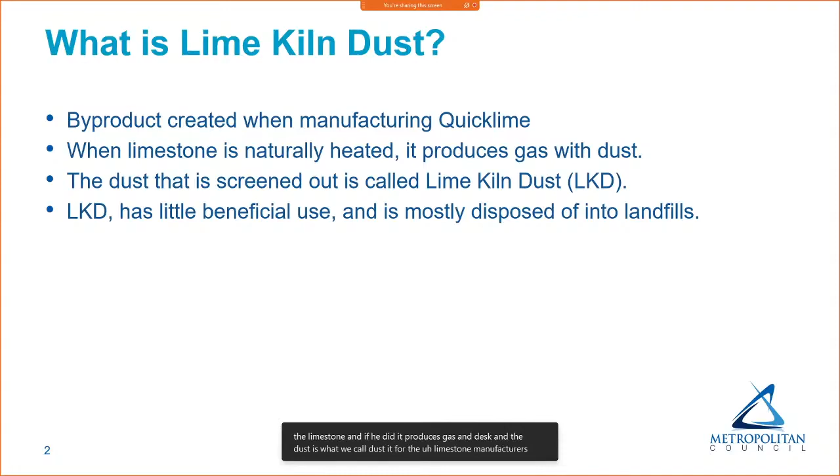Next slide, please. So first off, just an introduction to what lime kiln dust is and what we use it for. It's a byproduct of manufacturing quicklime, and when the limestone is heated, it produces gas and dust, and the dust is what we call lime kiln dust. For the limestone manufacturers, it has very little use and is mostly disposed of into landfills.

Next slide, please. So what we use it for at Metro is when the incinerators are down, there's still continual biosolids sludge being produced. So some of that has to go through the load-out system and be disposed of at a landfill. It depends on the situation, whether sludge storage is full or not, a lot of details anyway. But the point is, when it goes to landfill for disposal, according to Minnesota law, it must be a Class B biosolid. The way that we make our biosolids a Class B treated biosolid is to raise the pH of it for 2 hours, and that's what our lime kiln dust does.

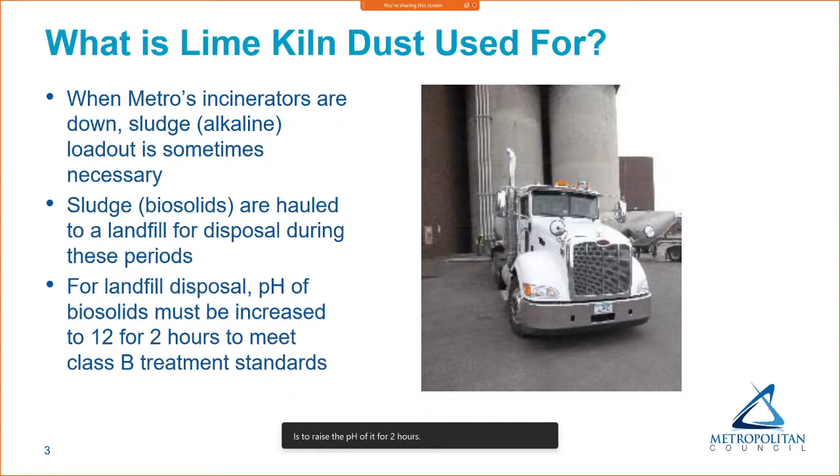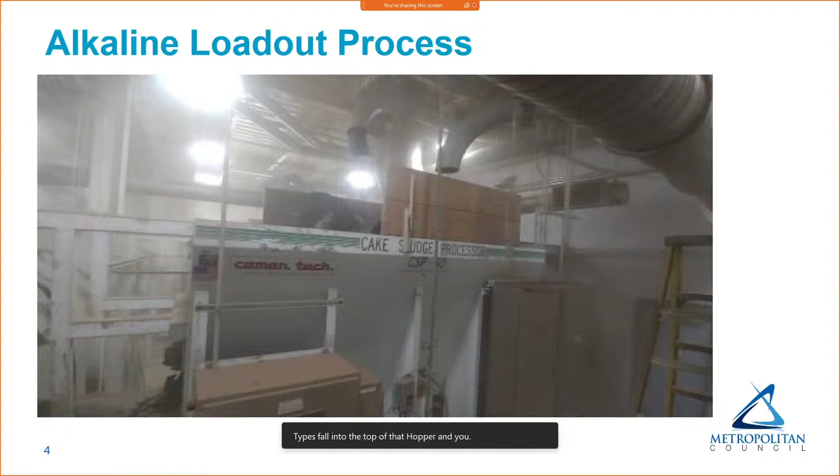Next slide, please. So here's a couple photos of how the system actually works. What you can see is a giant hopper there. It says cake sludge processor, and then 2 pipes fall into the top of that hopper, and you can actually see some of the biosolids falling into the top of that hopper.

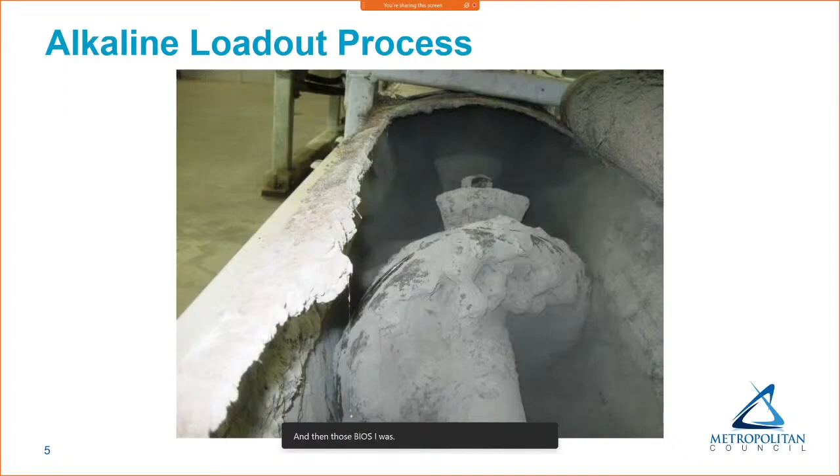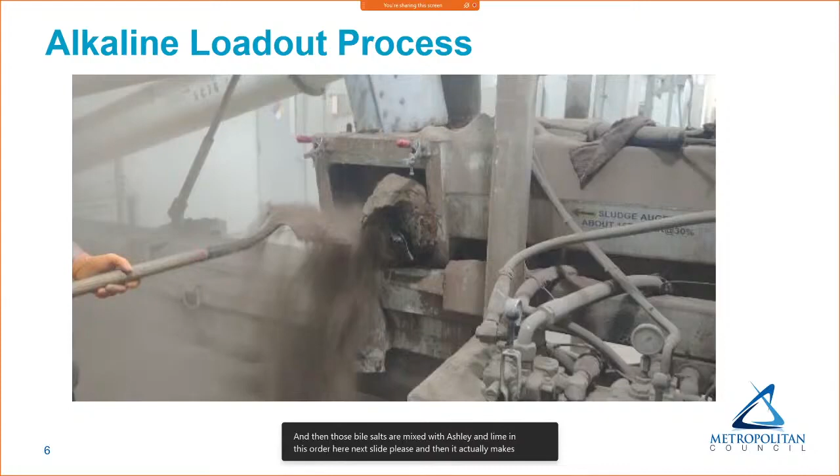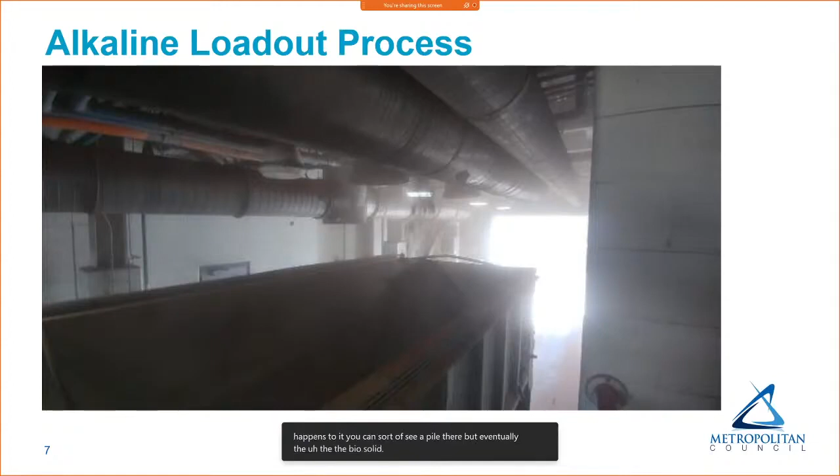Next slide, please. And then those biosolids are mixed with ash and lime in this auger here. Next slide, please. And then it actually makes a sort of dirt-like consistency as opposed to a spongy biosolid material. Next slide, please. I didn't have a great picture of this, but this is what happens to it. You can sort of see a pile there, but eventually the biosolids fall out into the back of a truck where it's hauled to landfill. Next slide, please.

As I mentioned before, this contract is a renewal of the current contract, which is expiring. And we completed an invitation for bids on January 4th.

We had a pre-bid meeting on January 19th where we had 2 plan holders and they both attended. We had a public bid opening on February 4th and we had 1 responsive bid from Omni Materials. Since we had 1 bid, procurement completed an adequate competition determination.

Next slide, please. This contract is for 4 years and an amount not to exceed $1,476,000. The first 2 years of the contract would be at $86 a ton, and the second 2 years, $88 a ton. The Office of Equal Opportunity did not set an MCUB goal for this contract due to the specialized nature of the product that we're purchasing.

Next slide, please. The proposed action is that the Metropolitan Council authorizes the regional administrator to award and execute a contract to Omni Materials, Inc. for lime kiln dust delivered to the Metropolitan Wastewater Treatment Plant. This contract will be for a period of 4 years with a total procurement not to exceed $1,476,000. And with that, I'd be happy to answer any questions.

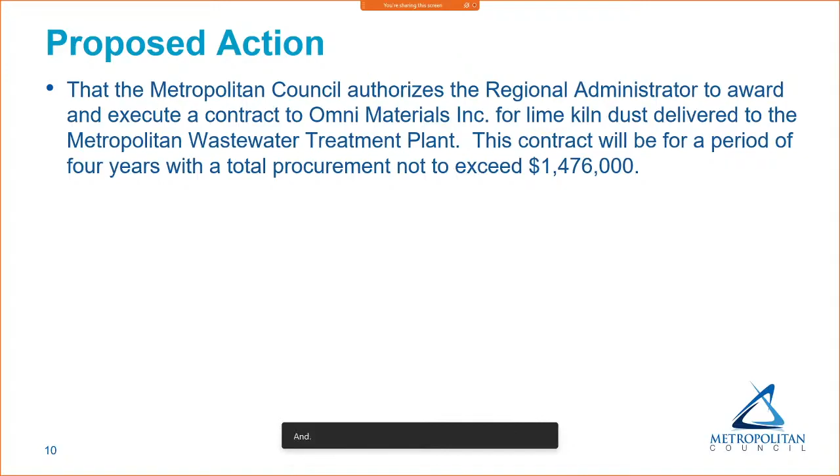Any questions? I can't see you all on my screen, so I see Councilmember Vento's got her hand up. Yeah, and this is a very, very random question, Joe. I probably should have warned you that I was going to ask this, but is this a product that poses any environmental or human risks in terms of exposure? I mean, are there side effects or hazards related to it?

Mr. Chair and committee members, yes, I guess I would say this is a dust that can damage lungs if you are in close proximity to it, and there's a lot of it. So we take great care in handling this.

I failed to mention it, but one of my pictures on the slides was the truck. It blows the lime kiln dust into the silo itself, and then it is mixed with the biosolids when it's coming out into the back of the truck. So when everything is running correctly, no one is in contact with the lime kiln dust itself.

Okay. And there's training that goes on for— excuse me, Mr. Chair, if I could. Yep, please. There's training and procedures to help the folks working there protect themselves and maintain safe practices.

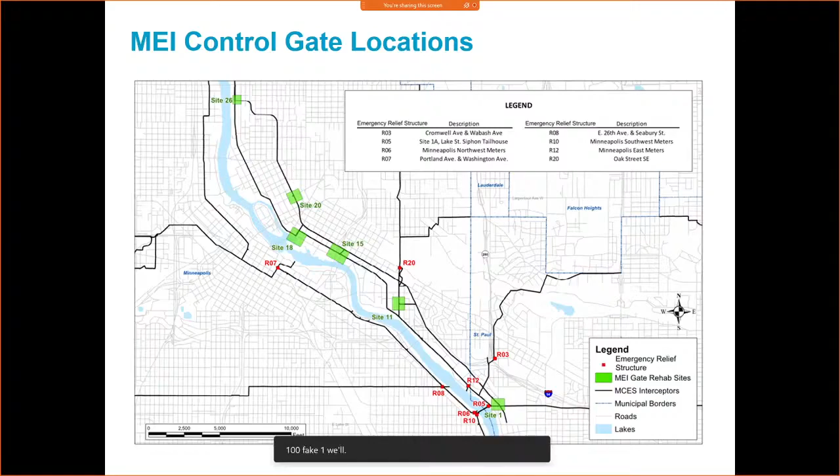Site 11 is at Oak and Essex on the University of Minnesota. The new MEI tunnel is capable of storing wastewater under surcharge pressure with regulating gates at its outlet to the joint interceptor 1MS 100 at Site 1, located at Pelham and Otis. Next slide, please.

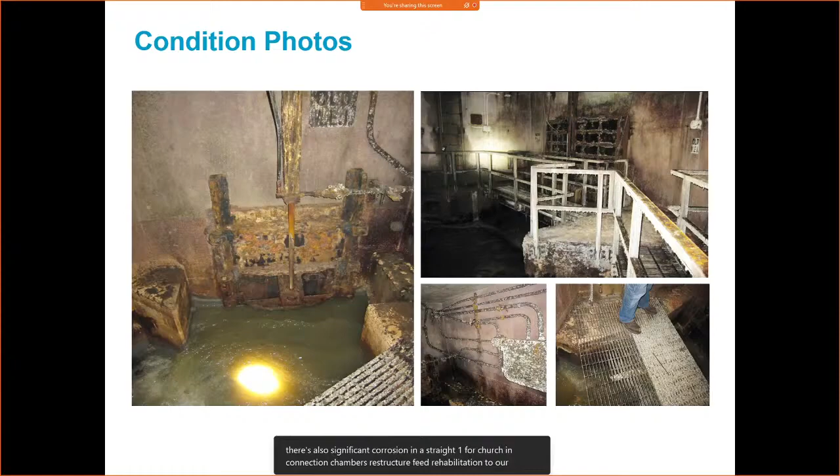A recent inspection of the MEI control gate structures identified major corrosion of sluice gates, grating, concrete, and electrical systems, as you can see in the photos. Other corroded elements included ladders, stop log channels, crane rails, hatches, and hydraulic power units. All existing sluice gates were found to be inoperable. There's also significant corrosion in the Site 1 surcharge and connection chambers. These structures need rehabilitation to allow the MEI system to control flows and surcharges and maximize system capacity as originally designed. Next slide, please.

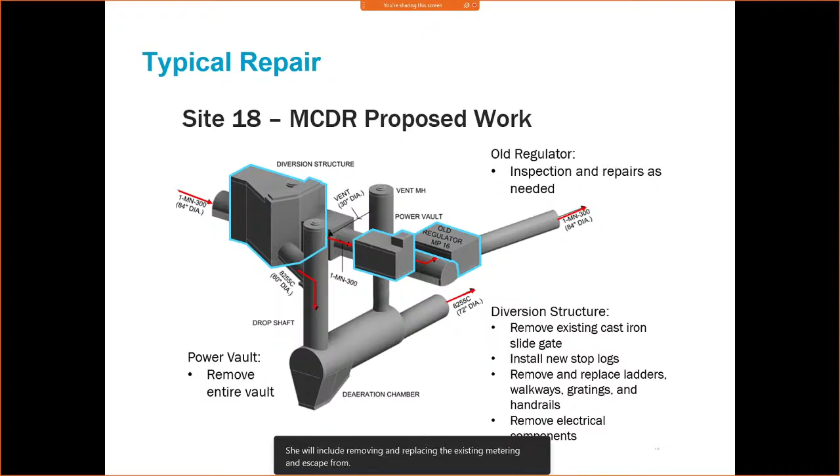Typical control gate repairs will include removal and replacement of existing sluice gates and hydraulic power unit systems with stop logs, removal of electrical systems, removal and replacement of ladders, platforms, gratings, and handrails, and cleaning and repair of concrete surfaces as needed. Site 1 rehabilitation will include removing and replacing the existing metering and sluice gate systems and replacing the roof of a fan building. Next slide, please.

4 bids ranging from $13,424,500 to $15,595,000 were received. PCI was the lowest responsible bidder at $13,999,225. Next slide, please.

The proposed action is that the Metropolitan Council authorizes its regional administrator to award and execute a contract for MEI Control Gate Rehabilitation Project 807-643, Contract 20P291, to PCI Roads for its low responsible bid of $13,999,225. Next slide, please. Thank you, Mr. Chair, and I'll take any questions anybody has. Thank you. Any questions?

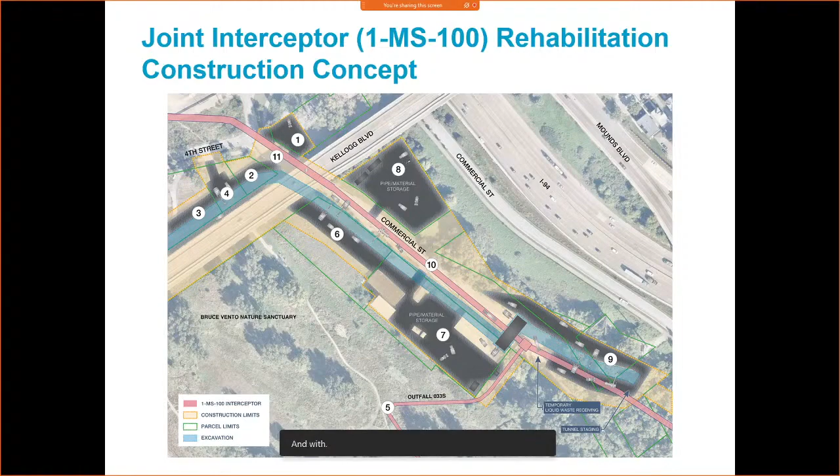And with that, the next slide, I'm going to turn over the presentation to Greg Ewig to talk about our land acquisition efforts. Thanks, Adam.

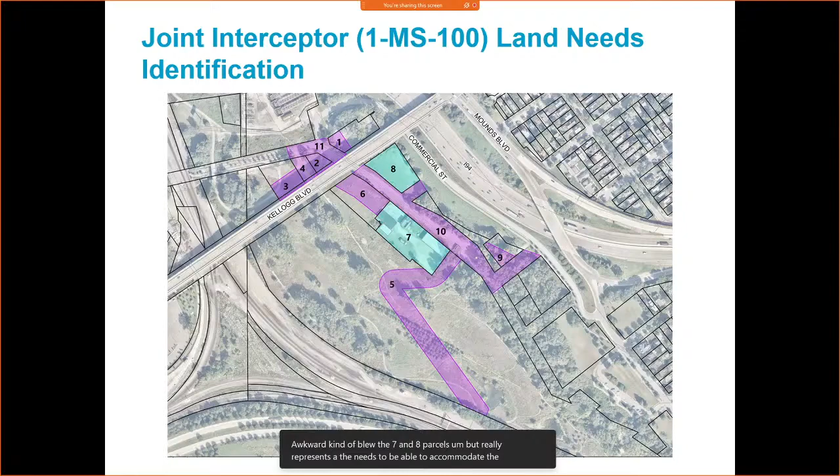Mr. Chair, committee members, if you recall from the previous slide, the numbers correspond here, but the rough outline that we're talking about for real estate needs include primarily easement acquisitions from the city of St. Paul. There's also a few private property acquisitions here denoted in the aqua blue, the 7 and 8 parcels. But this really represents the needs to accommodate the rehabilitation of the pipe and also some construction staging areas. So if we could go to the next slide, Jason.

At this point, to date, we have, as Adam described, identified the parcels and the necessary rights, roughly 11 total. There were a few city agreements related to the area that gave the council some rights as to obtaining easements, so we've had an open channel with the city of St. Paul in those discussions. Looking ahead, subject to approval here, we're looking towards having a more directed conversation with the city and the private owners. We expect that we will then undertake the normal due diligence, which includes environmental investigations, and ideally an acquisition target by the end of this year, if all goes according to plan. So we could have the next slide.

Adam, I think I'm passing it back to you for the action. I can take this one.

Tonight, our proposed action is that the Metropolitan Council authorize the acquisition of all easements and fee interest necessary for the ongoing maintenance of the 1MS 100 interceptor sewer, liquid waste receiving operations, and future construction to rehabilitate the interceptor and associated facilities in the vicinity of 4th and Commercial Street in the city of St. Paul, adjacent to the Bruce Vento Nature Trail and Nature Sanctuary. Happy to take any questions.

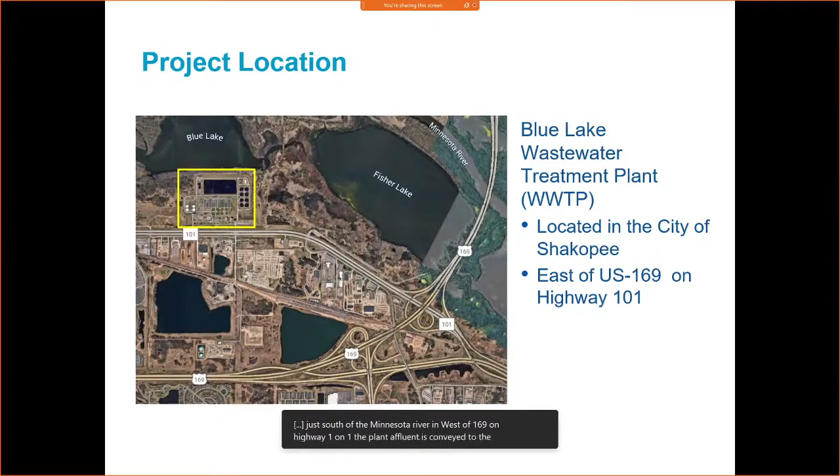Next slide, please. The Blue Lake Wastewater Treatment Plant treats wastewater from 29 communities and 300,000 residents in the southwest metro area. The plant location shown here is in Shakopee, just south of the Minnesota River and east of 169 on Highway 101. The plant effluent is conveyed to the Minnesota River via a 1-mile pipe that heads west from the plant and turns north between Blue Lake and Valley Fair. Next slide, please.

The Blue Lake Facility Plan was developed in response to three main drivers. The first driver is the need to meet future environmental regulations. The MPCA established a river eutrophication standard for the stretch of the Minnesota River in the vicinity of the Blue Lake Wastewater Treatment Plant discharge. This standard will require that the plant achieve a 0.3 milligrams per liter effluent phosphorus limit. Blue Lake, as well as all of the other MCES wastewater treatment plants, are currently designed to achieve 1.0 milligrams per liter effluent phosphorus. The Blue Lake biological removal process is insufficient to meet 0.3 milligrams per liter effluent phosphorus.

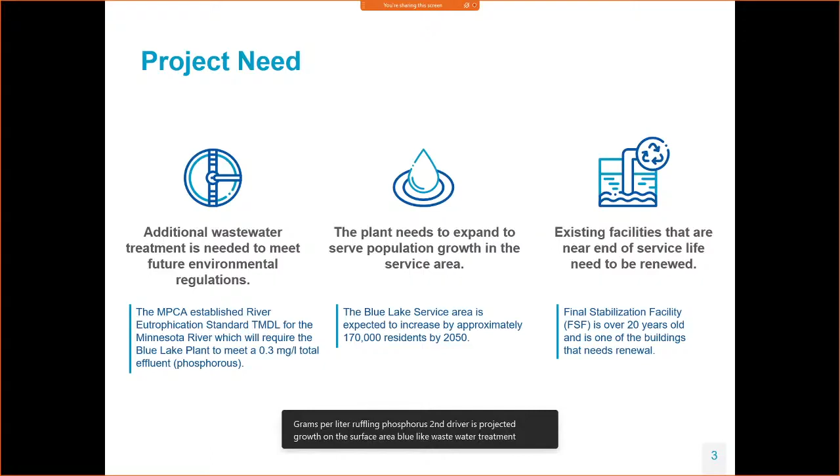The second driver is projected growth in the service area. The Blue Lake Wastewater Treatment Plant will reach its existing average daily wastewater flow capacity of 35 MGD between 2030 and 2040. The third driver is aging equipment and infrastructure. Condition assessments indicated some facilities are nearing end of service life, primarily the final stabilization facilities, which we call FSF. Next slide, please.

The major scope elements of the plan include aeration tank improvements, addition of a 4th digester, renewal of the final stabilization facility, addition of 2 secondary clarifiers, a new primary treatment complex, addition of tertiary filtration, addition of 1 aeration tank, a new blower, a tertiary treatment head loss channel, expansion of effluent pumping, and renewal complex and thickening and dewatering.

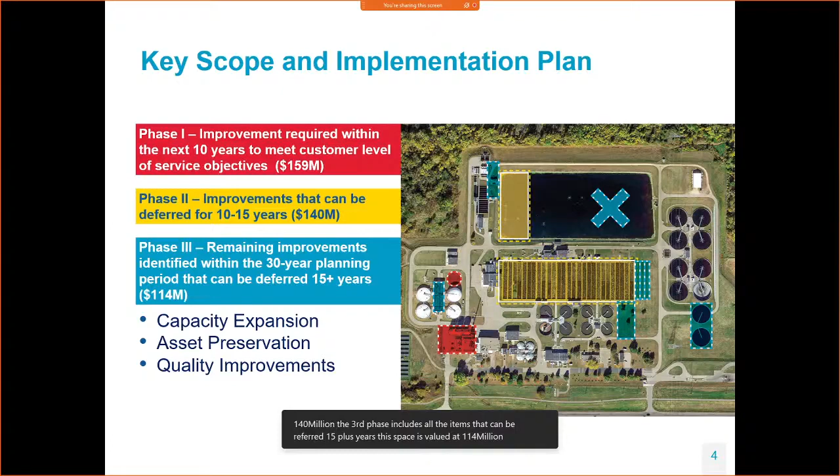The proposed schedule is to have 3 different cycles of design, construction, and commissioning for each of the phases, with the first beginning in 2022. We anticipate the construction projects will each be about 2 years, but a 5-year window is provided for the work to be completed at the time when it is necessary. Also, the second phase has an extended process-proving phase because the tertiary treatment will be a new process to MCES.

Next slide, please. To summarize the project, over the next 25 years, the Blue Lake Wastewater Treatment Plant will undergo large-scale projects in order to meet future environmental regulations of a 0.3 milligrams per liter effluent phosphorus, increase capacity to accommodate projected growth in the service area, and renew multiple assets as they reach end of life. Also, the project includes sustainability elements that will increase biogas recovery, which will reduce purchased electric power, and increase phosphorus recovery. Next slide, please.

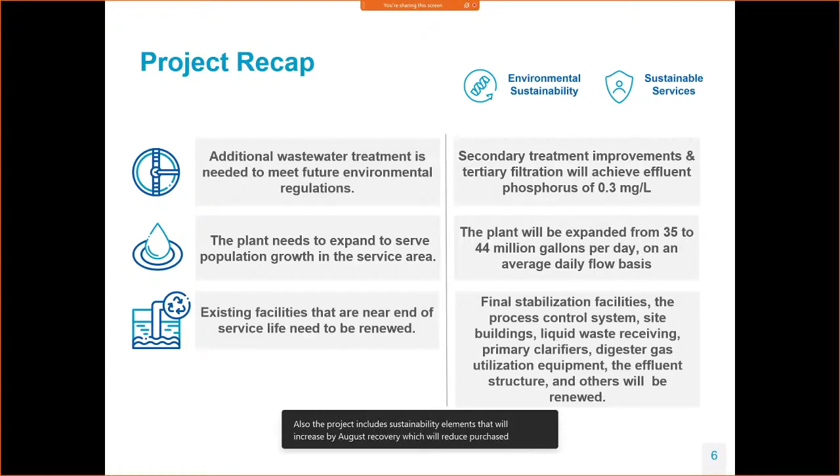Thank you to those members of the committee that virtually attended the public hearing. The public comment period was open until March 25th. During the public review period, there were 2 individuals that each submitted 4 questions. These will be reviewed in the next 2 slides.

Today is the Environment Committee meeting where the business item is being presented, with the plan to have it on the April 28th agenda for the Metropolitan Council meeting. Following approval by the Metropolitan Council, the facility plan will be submitted to the MPCA. Next slide, please.

The first set of questions came from Steve Lillehaug, the Public Works Director for the City of Shakopee. These were received before the public hearing and were read during the Q&A session of the public hearing. His questions included: will there be an increase in the size of the wastewater treatment plant? To answer that, we said no, the existing perimeter fence and levee were large enough to contain all planned improvements. His next question was what traffic impacts are expected?

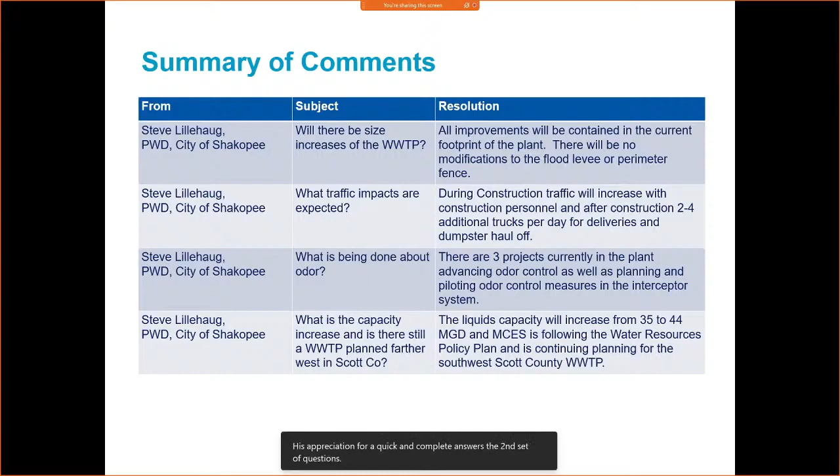The second set of questions came from Linda Loomis of the Lower Minnesota River Watershed District. She asked if the outfall repair work can be moved to phase 1. MCES has been measuring erosion on the riverbank for 4 years now, and we have a trigger point of erosion for when the work will be done. We stated that MCES has planned to do the repairs at the time they are necessary based upon the MCES annual erosion monitoring, so this may be in phase 1 if the erosion speeds up at all.

The second question: will you be applying for a permit from the Lower Minnesota River Watershed District? MCES intends to apply for a permit for the work at the outfall and the work at the liquid waste receiving station, which is outside of our flood levee, in accordance with the criteria in their documents.

The third question: will MCES be applying for a new appropriations permit? MCES does not anticipate needing to modify the existing groundwater appropriation permit for the Blue Lake wastewater treatment plant.

The fourth question: is the groundwater used for plant processes? We answered that the Blue Lake wastewater treatment plant reuses effluent water for non-potable water uses throughout the plant. The groundwater is withdrawn for protection of infrastructure and then discharged to the Minnesota River through the outfall pipe.

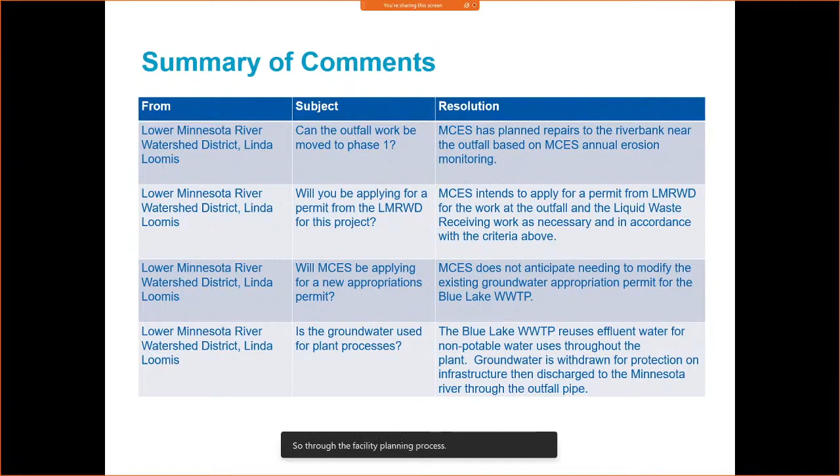Through the facility planning process, we found no opposition to the plan.

The proposed action is that the Metropolitan Council adopt the facility plan for the Blue Lake Wastewater Treatment Plant improvements, MCES Project 809700, per resolution number 2021-15 attached to the business item. With that, I thank you for your time, Chair Lindstrom and members of the committee. Renee and I can answer questions now, or you can email us later if you like.

Great presentation. Any questions for Mr. Peterson? Seeing none, I don't believe. Chair, I do not have any hands raised at this time. All right.

Is there a motion? Wolf moves approval. I heard Wolf first, and I'll take Councilmember Vento for a second on that one. Sounds good. All right, roll call please. Fredson, aye. Sterner, aye. Vento, aye. Wolf, aye. Zarin, aye. Thank you. And Lindstrom, aye.

Thank you, thank you. That takes us to the General Manager's report. Lisa, what do you got for us this week? A short report. I figured it might be good to do a touch base on the COVID cases because they're spiking in Minnesota.